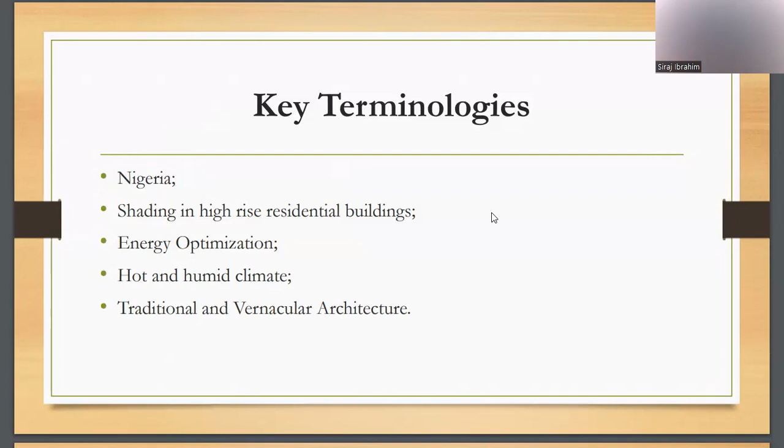Under the introduction, the world faces challenges of climate change and energy efficiency. Passive shading strategies have become increasingly important in high-rise residential buildings, especially in hot and humid climates. So you might ask why I decided to go for passive shading strategies.

Agreed and admitted there are other passive design strategies affiliated with energy efficiency, but I opted for passive shading strategies because they are the most easily retrofitted when it comes to the bulk of existing buildings which have no consideration of energy efficiency.

It's also a low-cost form of passive design strategies in the sense that it encompasses households of different status, from the high income to the low income earners.

Also, the use of vernacular and traditional buildings can be invaluable for contemporary modern architecture in terms of passive cooling techniques through passive shading. This study explored the implications of passive shading strategies for high-rise residential buildings in hot and humid climates, drawing on lessons from vernacular and traditional buildings within the major ethnicities in Nigeria.

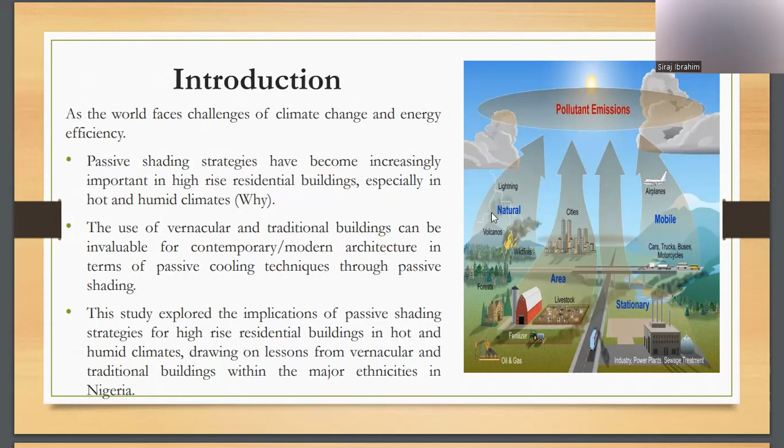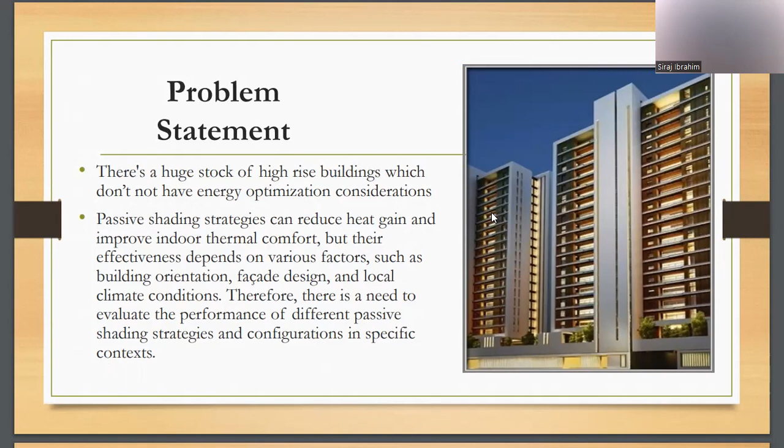The problem statement goes as follows. There's a huge stock of high-rise buildings which do not have energy optimization considerations. Passive shading strategies can reduce heat gain and improve indoor thermal comfort, but their effectiveness depends on various factors such as building orientation, facade designs, and local climatic conditions. Therefore, there's a need to evaluate the performance of different passive shading strategies and configurations in specific contexts.

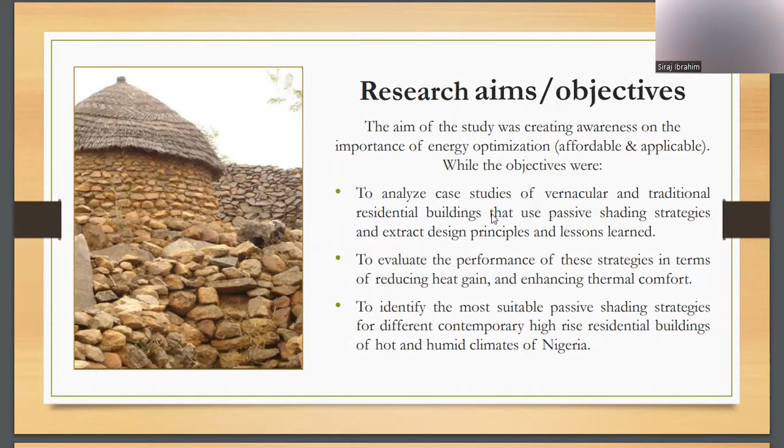For the research aims and objectives, the aim of the study was creating awareness towards professionals of the importance of energy optimization, while the objectives were to analyze case studies of vernacular and traditional residential buildings that use passive shading strategies and extract design principles and lessons learned within, to evaluate the performance of these strategies in terms of reducing heat gain and enhancing thermal comfort, and lastly, to identify the most suitable passive shading strategies for different contemporary high-rise residential buildings of hot and humid climates within Nigeria.

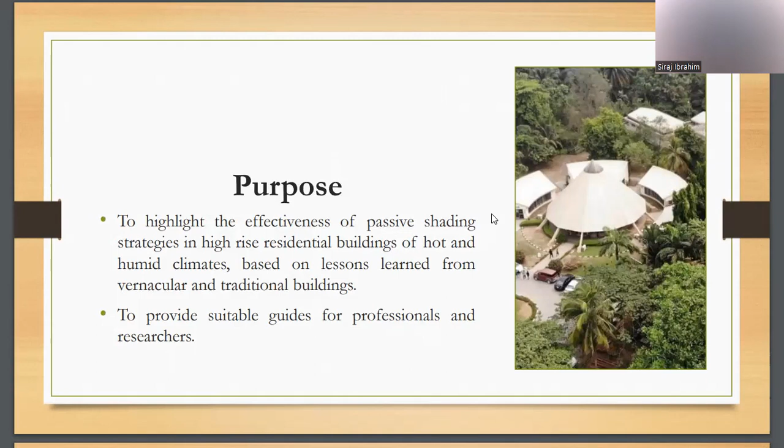The purpose of the research highlights the effectiveness of passive shading strategies in high-rise residential buildings of hot and humid climates based on lessons learned from vernacular and traditional buildings, and also to provide suitable guides for professionals and researchers.

The significance of the study is majorly to contribute to sustainable architecture. Passive shading strategies can reduce energy consumption and improve indoor thermal comfort, which is crucial in regions with high temperature and high humidity.

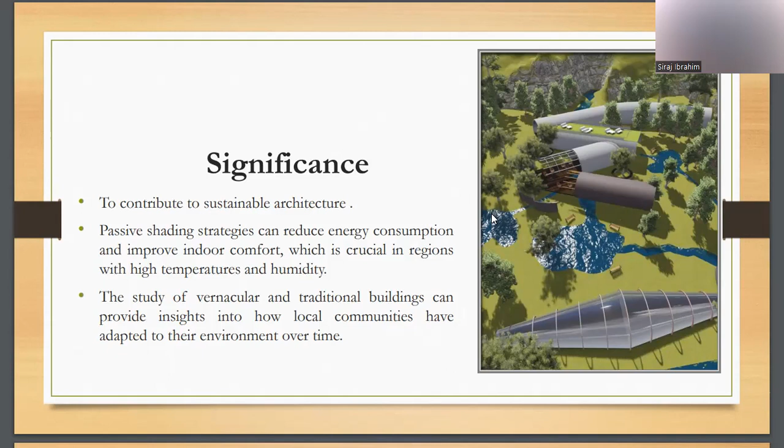The study of vernacular and traditional buildings can provide insight into how local communities have adapted to their environment over time.

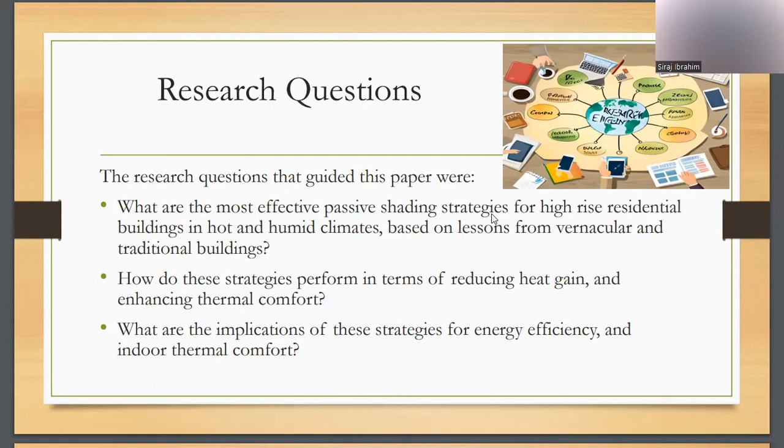The research questions that guided this paper were: what are the most effective passive shading strategies for high-rise residential buildings in hot and humid climates based on lessons from vernacular and traditional buildings? How do these strategies perform in terms of reducing heat gain and enhancing thermal comfort? And lastly, what are the implications of these strategies for energy efficiency and indoor thermal comfort?

Design methodology speaks about two major components: firstly is the study area, which happens to be Nigeria, and then the means for data collection.

The means for data collection followed a mixed approach where we have the qualitative methods under which has subjective indicators, and quantitative methods which has objective indicators. Other forms for data collection are...

Desktop review of relevant peer-reviewed articles from peer-reviewed journals associated with passive shading strategies by vernacular and traditional builders, field study of the vernacular and traditional buildings in regions within the context of Nigeria to observe design features and shading techniques.

There was also case study analysis, which was drawn from the review of relevant literature associated with the most effective passive shading strategies associated mainly with high-rise residential buildings in hot and humid climates.

For the case study analysis, the criteria was governed by picking 5 buildings within the major 5 ethnic groups within Nigeria.

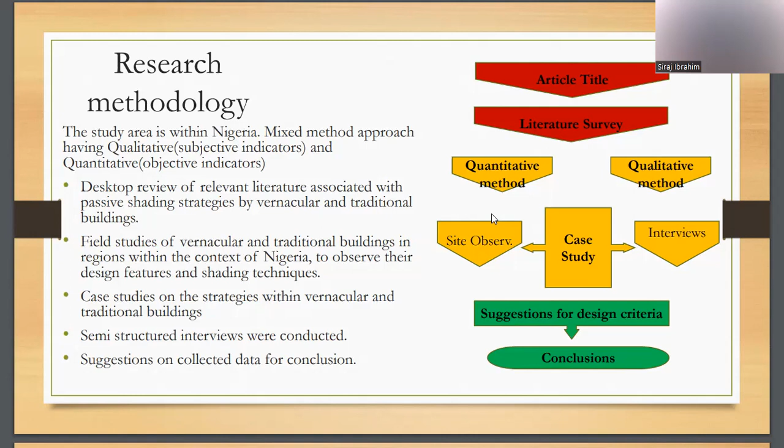What is the most effective passive shading strategy for houses in hot and humid climates in terms of reducing the demand on energy consumption in contemporary high-rise residential buildings, which can be recalled from vernacular and traditional buildings?

Secondly, we sought to know the preferred passive shading strategies that can be developed in the contemporary high-rise residential buildings depending on vernacular and traditional houses.

And lastly, we asked for the most adaptable passive shading strategies that can be developed within the contemporary high-rise residential buildings, depending on the vernacular and traditional buildings.

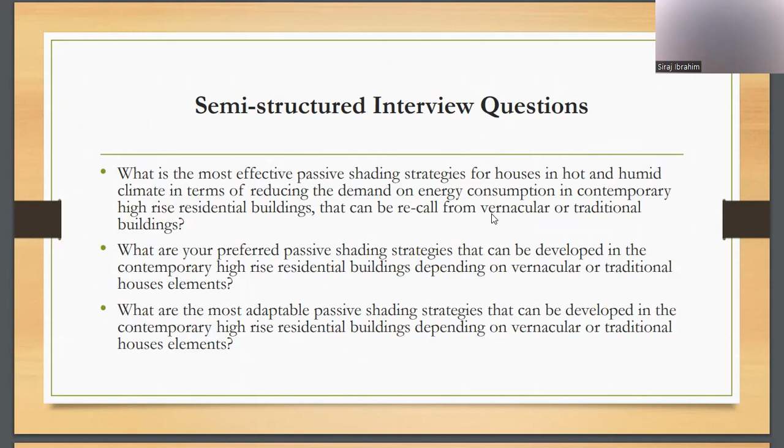In conclusion, the study was expected to proffer suitable passive shading strategies for energy optimization and indoor thermal comfort for high-rise residential buildings through providing recommendations for effective passive shading strategies.

The research will contribute to low-income households on the subject matter. It will also prove that some ancient passive shading strategies are invaluable. The integration of shading strategies should not compromise other important design considerations such as daylighting, views, acoustics, and aesthetics.

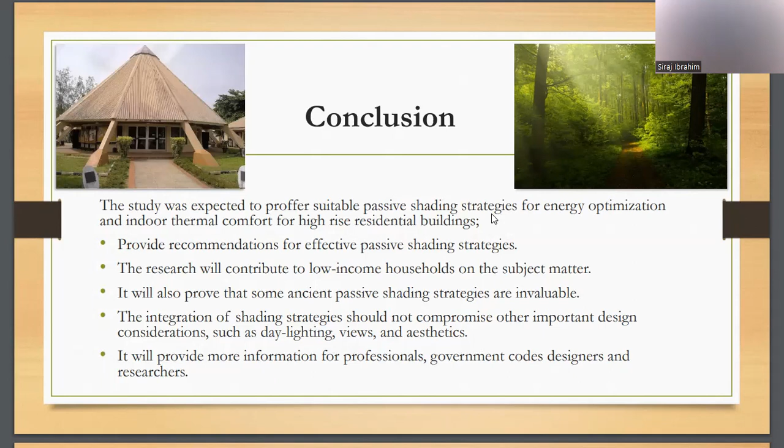Lastly, but not the least, it will provide more information for professionals, government code designers, and also researchers in the future.